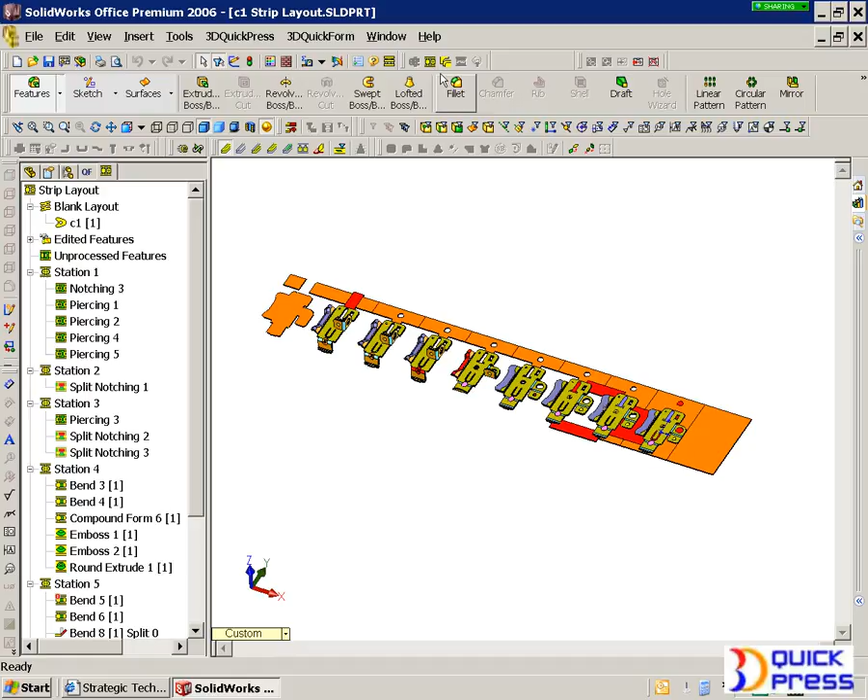Let's take it into punch design. So this is where Quick Strip kind of stops. Quick Strip, so far, what you've seen is a subset of Quick Press. Quick Press now extends it to go to the next level, which is punch design and die set creation and drawing creation. So we're going to do that by setting up a project ID and giving it the press information,

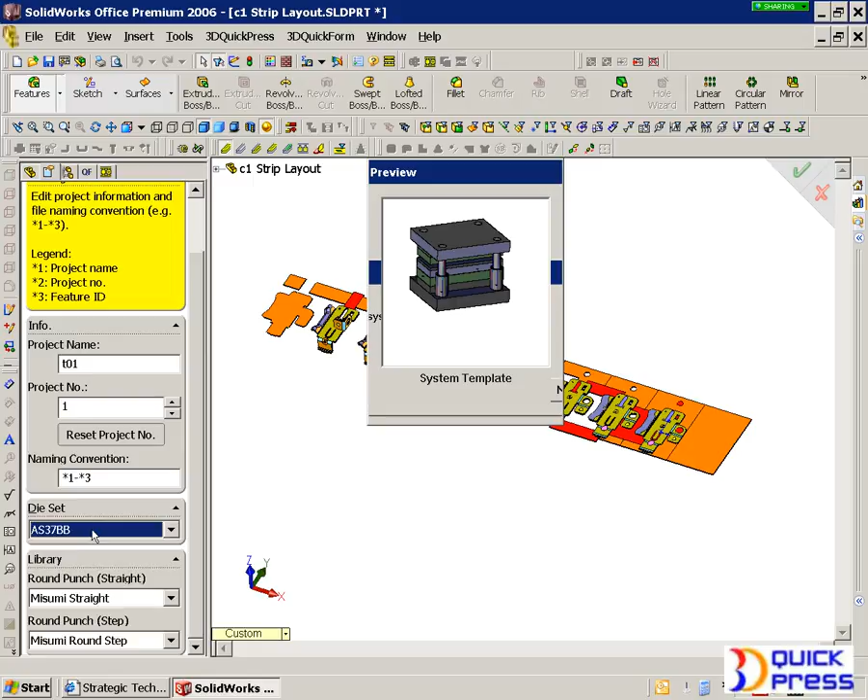maybe the style of die set, maybe it's the customer-specific one, and I'm going to give it a project name, T01, and it's going to be the first project for that project name. And then we can pick from different die set styles. These can be defined by you. So what you see here is just a series of samples. And that's really where the power comes in, is you can define these yourself very easily, and then they can be reused. Now let's go to the next one.

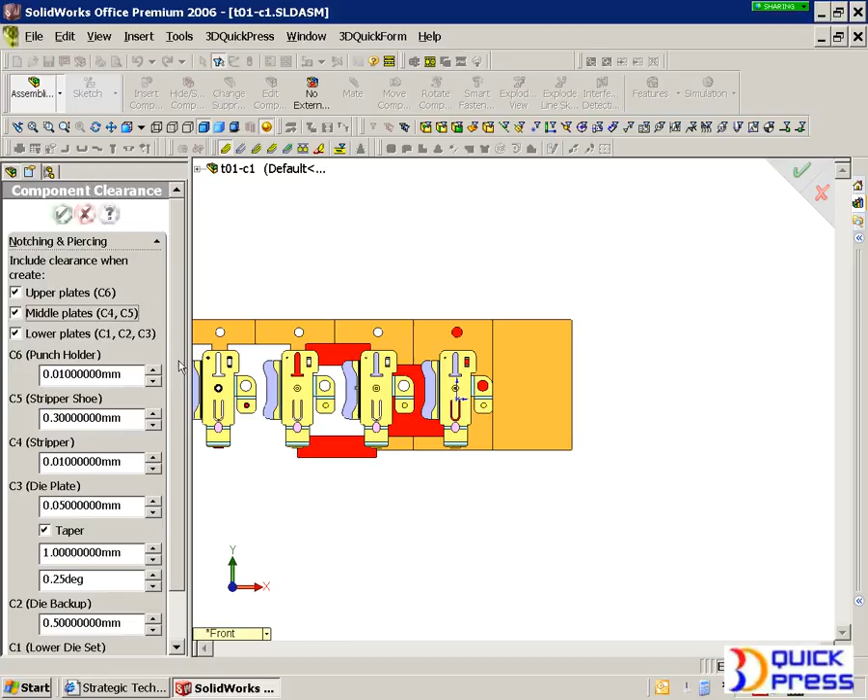The next thing it's going to say is, alright, so you got this new job, you want me to use this style of press or this style of tool set. And now what about your clearances for this job? Anything specific? You can change it depending on the style of the tool, the taper, the land. It's all going to be created for you. So you can automatically change anything we create, but it's going to give you a 90-10 approach. 90% of it's going to be done.

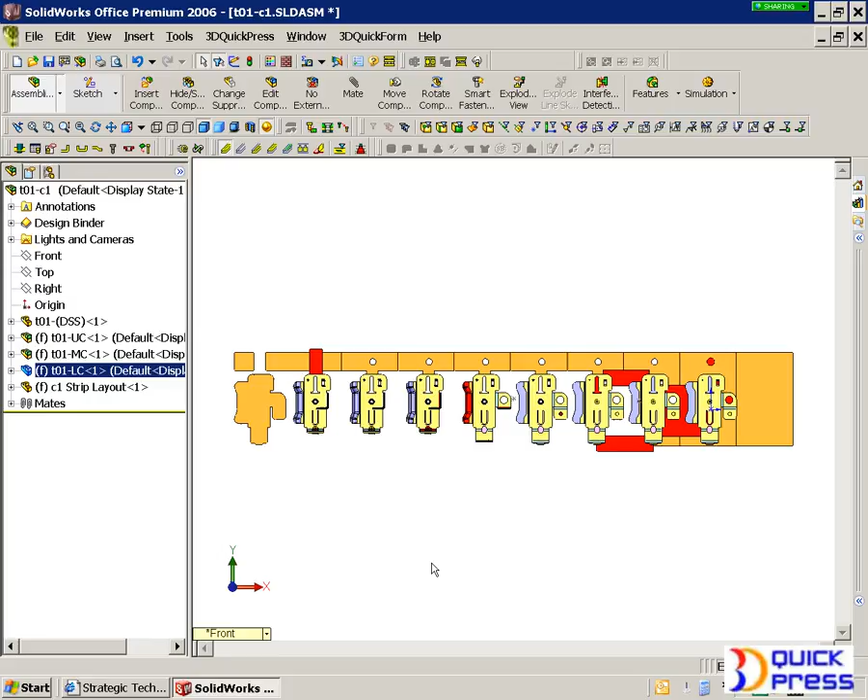Now, it built us an assembly. So we already got ourselves an assembly. You don't see any parts yet because we're going to build punches first. But we do have this upper component, lower component, middle component. You'll notice that as we build our punches, whether they're cutting, forming, bending, whatever, we'll auto-organize your die for you.

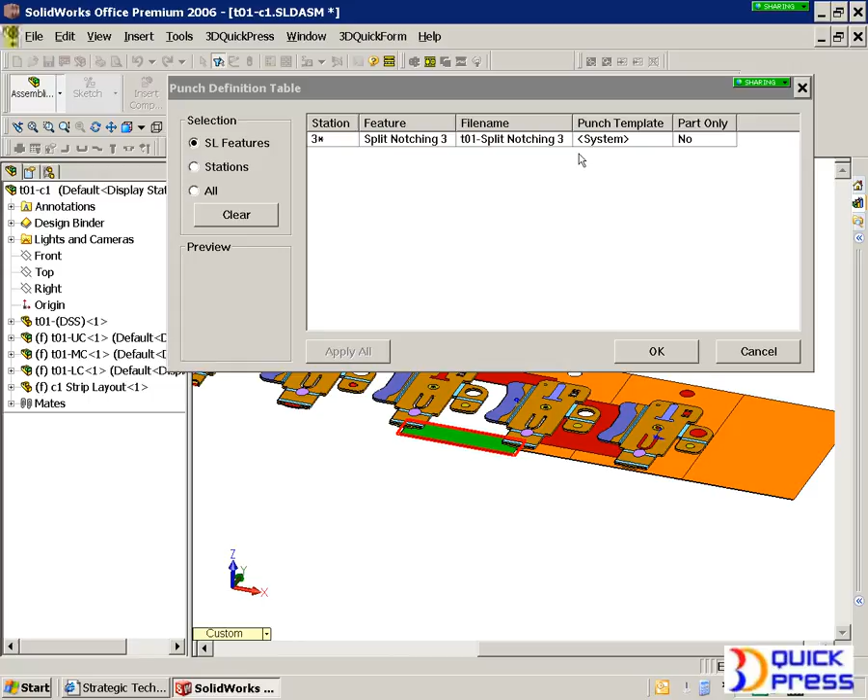Let's get started with tailoring some of the cutting punches. I'm going to pick this cutting punch right here, and I'm going to go into setup of the punch itself. I could tell it to be any type of retaining method, and these are customizable. I can tell it to use the system template, which is whatever I want as the default. As you can see here, we have many different styles, and there's no limitation on the amount of styles you can have because these can be defined by you.

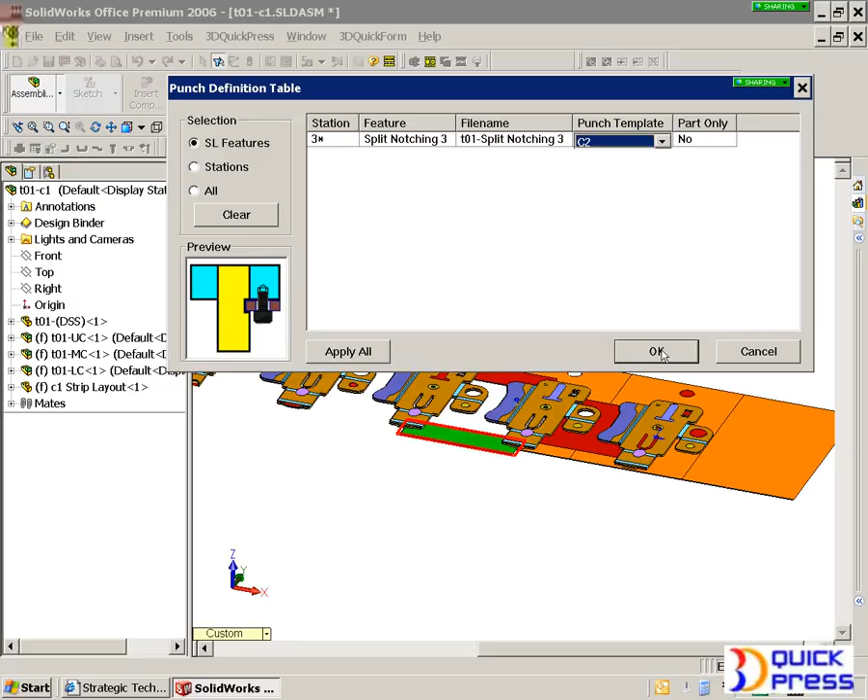So you can have everything from a manufactured, like a ball lock punch. You may want to do some other type of configuration where you have a fastener through the bottom, step with shoulder, pedestal with multiple fasteners, dowel pins, and so on. The main idea here is you can tailor it. Also, the openings that go below the die steel, you may want them to all be direct offsets. You may not. You may want them to be all rectangular. These are all variations of this.

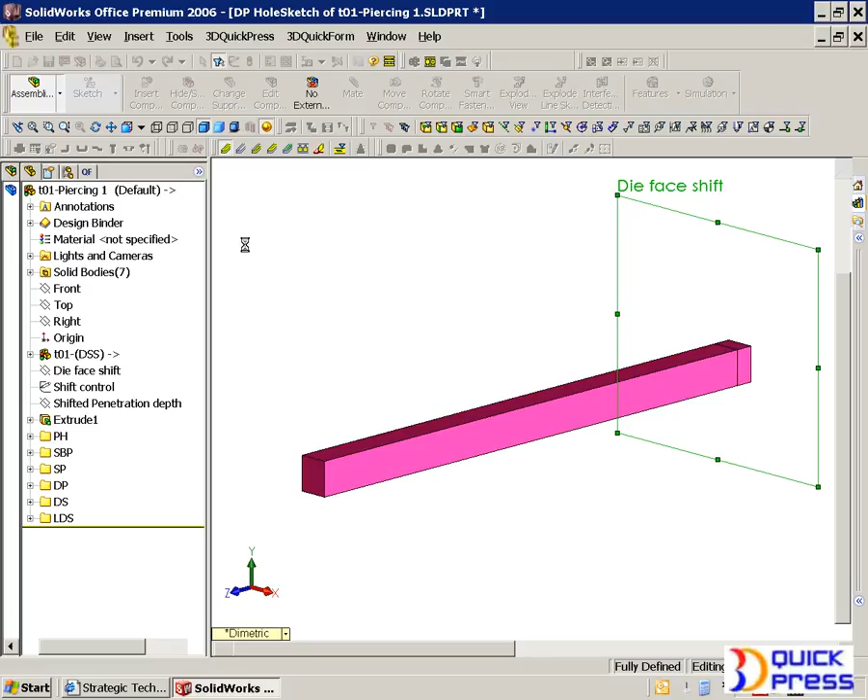Now, let's batch process the whole thing. Yeah, the whole thing. Let's take it and create all the cutting punches real time. So what this will first look for is similar punches. Okay, so let's say you have a similar piercing diameter, which is a purchase punch. It's going to first of all look for that in the catalog. If it can find a straight shank, it will. If it can't, it will create a stepped. Now, it will create all the holes through the entire die set based upon the current job information. It will also create any drawings necessary for each punch.

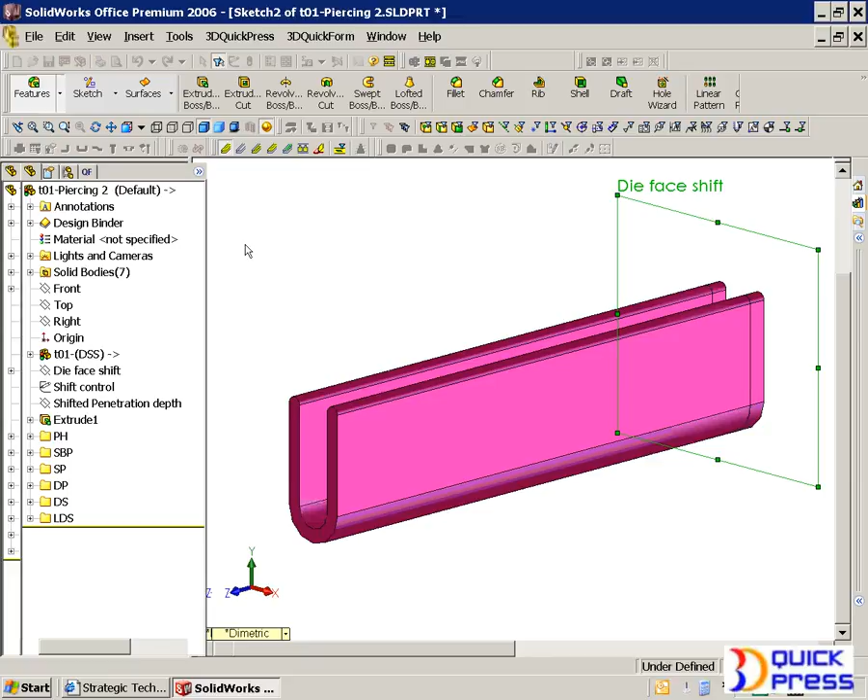But that thing about checking if it's unique or not, it doesn't only work for purchase punches, it also works for totally custom punches. So you can see there's different shapes on here. Let's say it was some kind of U shape that was used in 5 different areas. The punch will only be created once, one ID, one part number, but it will be instanced 5 times. We figure that out. Other CAD systems are going to create you 5 different part numbers even though it's the same punch. Talking about confusing people downstream.

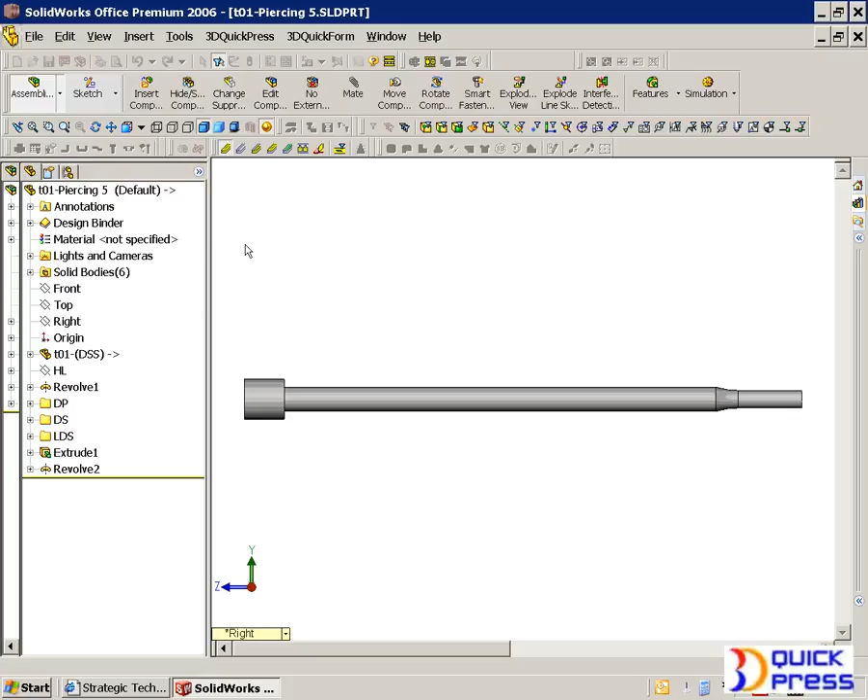The next thing it's going to do, like I said, is build all the holes. Then it goes into the punch assembly, and it figures out what assembly do I belong to. Do I belong to the upper components, like the upper die set? It could be the lower die set or the middle die set. It rearranges itself. If it's a sub-assembly, it decomposes itself and then rearranges itself. Like in a case of a bending die, right? There might be a punch on top and there's going to be a bend on the bottom. We need to dissolve the sub-assembly into 2 different areas. We take care of all this for you.

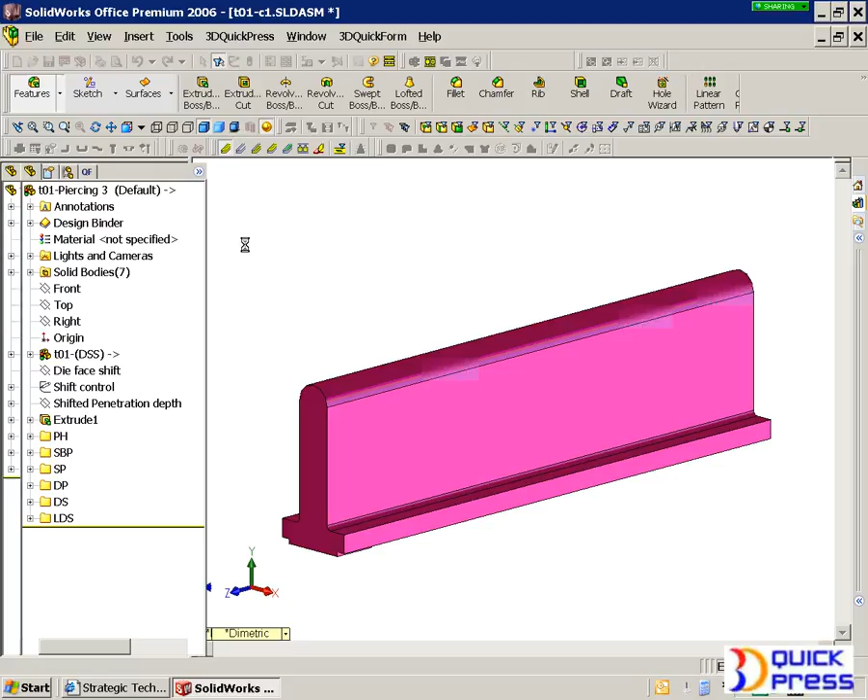On top of that, we're going to bring it into the strip layout and we're going to mount it on the strip area. You do not have to assemble this. We do it all, and we do it in high performance mode. Traditionally in 3D, you're going to mate everything. We don't mate anything. We programmatically control it with the strip itself, which keeps it very high performance.

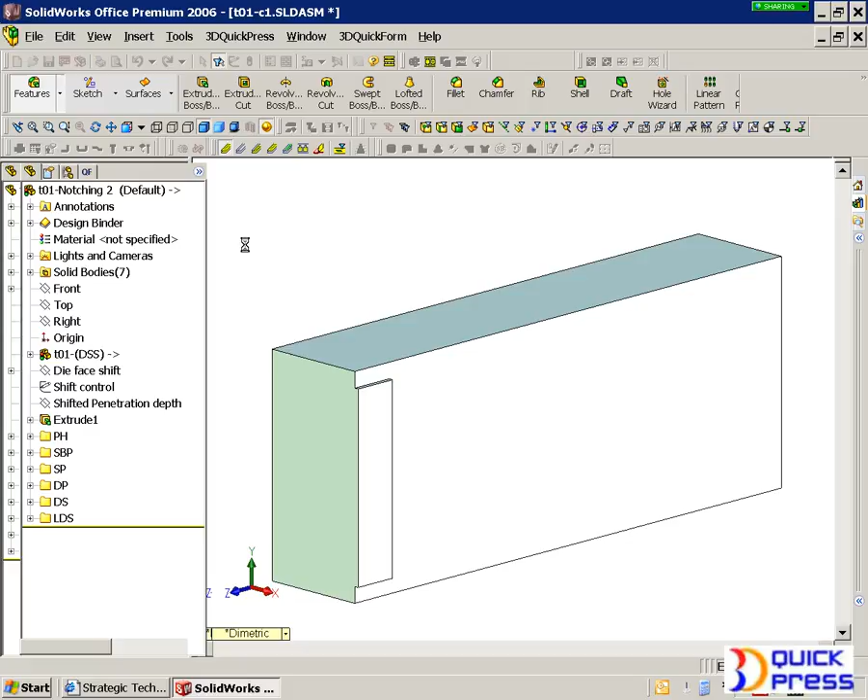So there are a number of other things, and like I said, drawings are being created too. So you still rely on drawings, which most of us do. We're going to automatically have the drawings done. Yes, you might have to tweak them a little bit, but everything is automatically picked up. The naming convention, the project ID, all the notes in there, all the attributes about the punch can be transferred into the drawing. So a lot of that is all kind of being pushed aside. If you're doing that manually today, it's going to be difficult to compete.

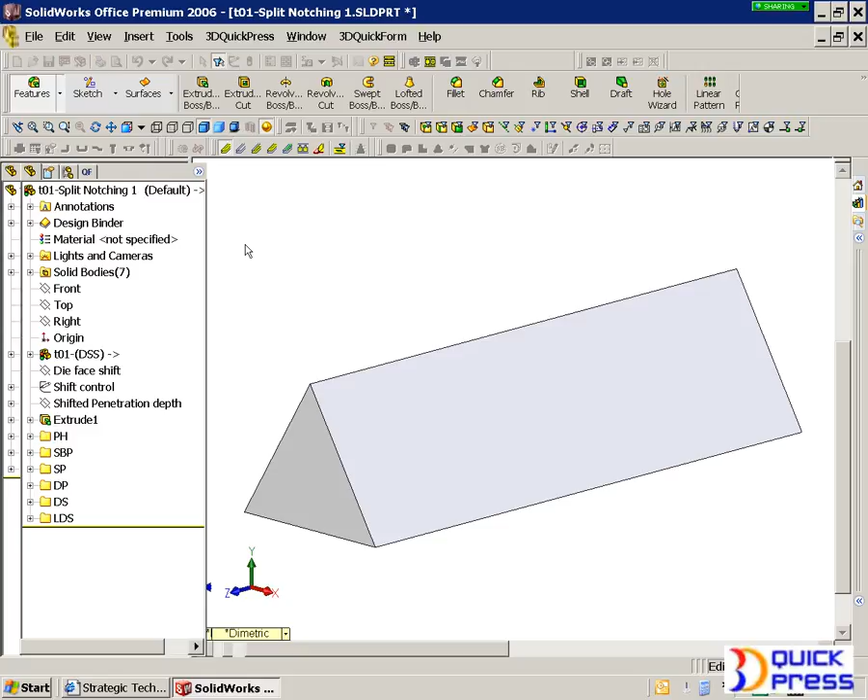So finally, it's going through and finishing up. Now it's going to bring in that last thing that I did that was custom for that one punch, that custom retaining option that I specified. It's going to look for the longest non-cutting edge, and it's going to align itself to that edge. It's going to automatically know that it's on the bottom of the punch holder because that's the way that template is set up. Well, the punch holder can be at any level per job. In this case, it knows the current level. That's the whole beauty of the automation.

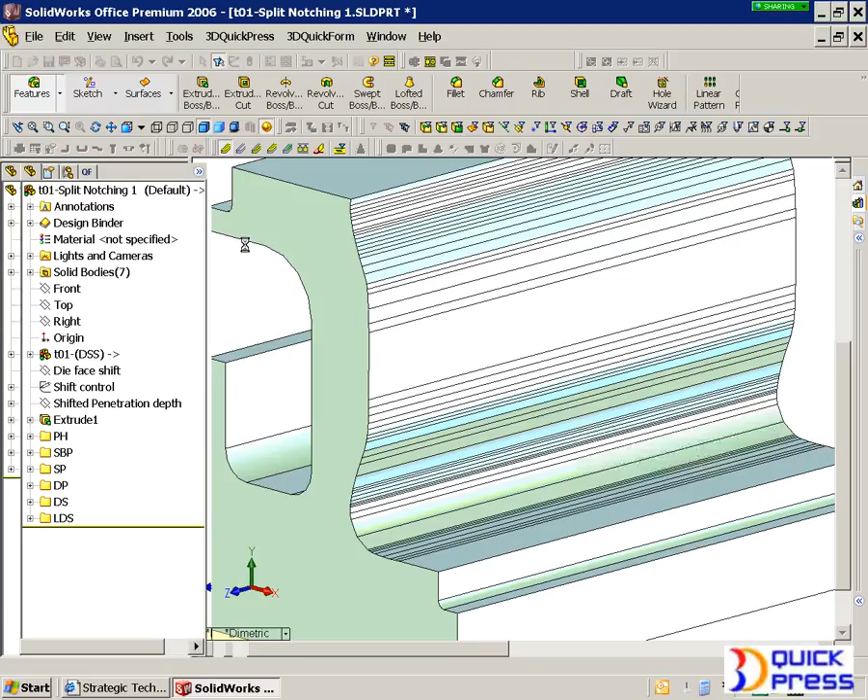Then we can rearrange it. We don't have to take where it gave it to us. You can tweak it. Everything that we create can be modified using traditional SolidWorks commands. This makes it very easy to modify if you're just getting started, for instance, and you don't know exactly how you want something created. So let us do the 90%, and then you can tweak and put your value-added design on top of it.

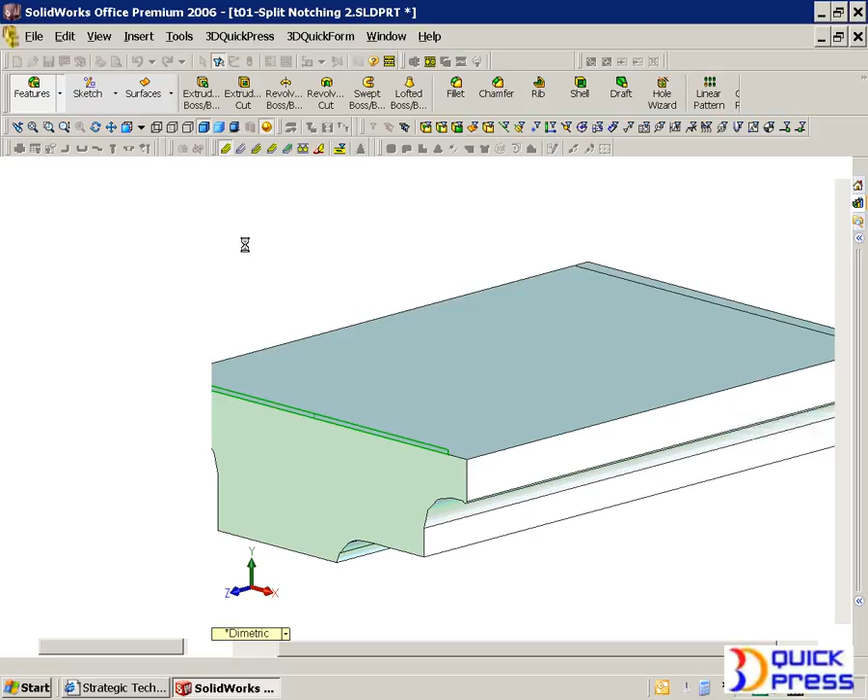So it's just finishing up here, and as you can see, it's also going up to the die face, and it's going to adjust. By the way, if there's any forming operation, then piercing or notching, we will automatically shift the penetration depth. So you don't have to, and obviously that occurs often.

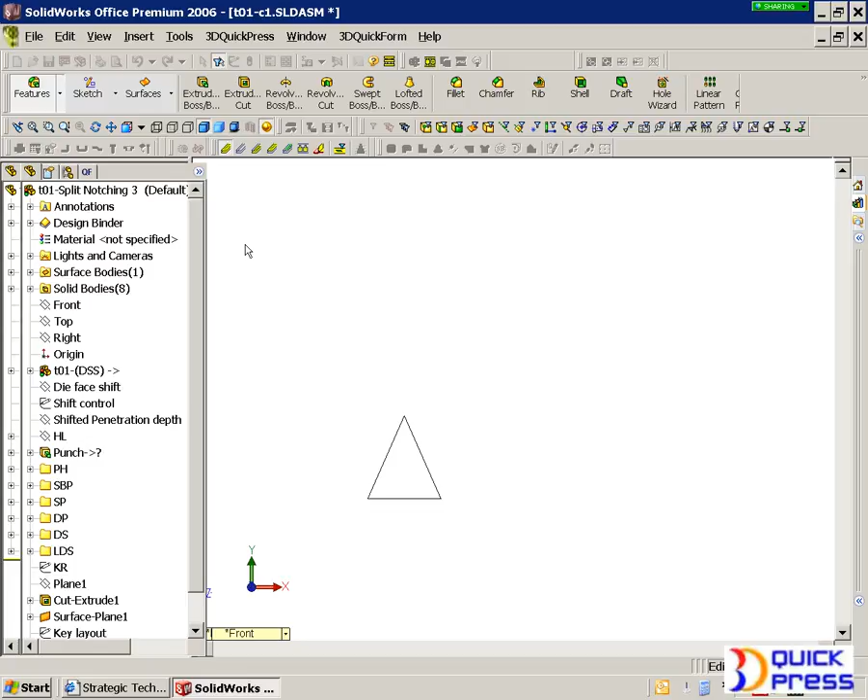So finally, let's just wrap up here. And I kind of like to do the whole thing just to show you that you could actually quote this out. If you spend a half an hour today putting together a presentation, you can quickly do that and still get your raw material properties, all your bounding boxes.

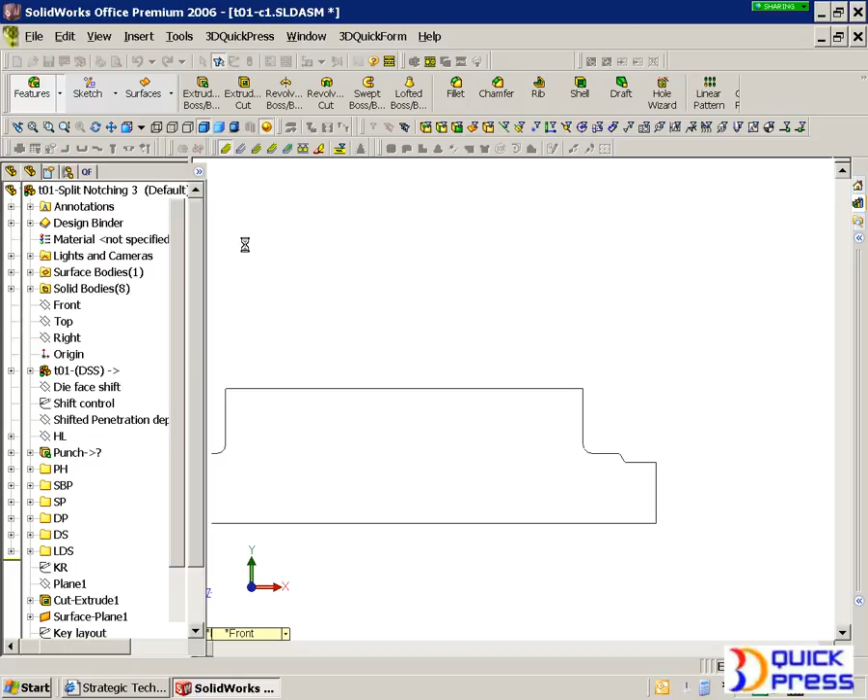And yes, we're working on a punch block notching capability, so you take all your piercings and notchings that are custom and throw them together in a cube and automatically nest them for your wiring operations. Yes, you'll be seeing that in the near future from Quick Press. So you won't have to sit there and build your own punch blocks. You just automatically throw all the punches in there, and it will automatically nest them with the material offset and so on. So these are the type of innovations; we're listening, we're taking our customers' input, and we're rocking the world. And we're only in version 2 right now. In version 3, you'll see many, many other enhancements.

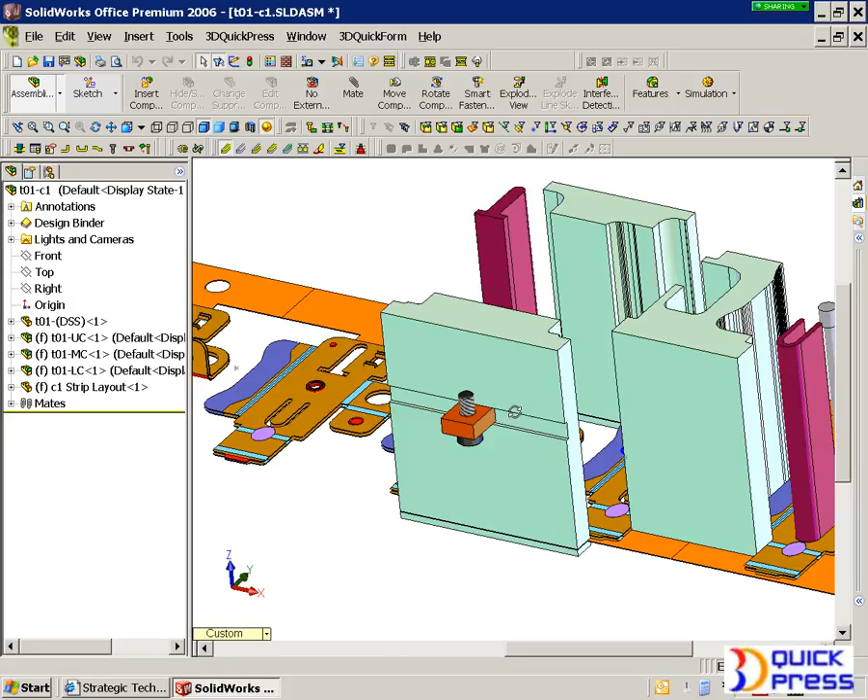So you can see there that we've got ourselves our punch set up pretty quickly. And here's that keyway I just mentioned. What if I want that on the other side? Well, simply by clicking on that entity on the top edge and just say edit the key reference, it switches it for me. So I don't have to mess around. So very quickly you can make changes and modifications. We can come back and add more punching, forming, bending, and all that real quick. Let's just keep moving here.

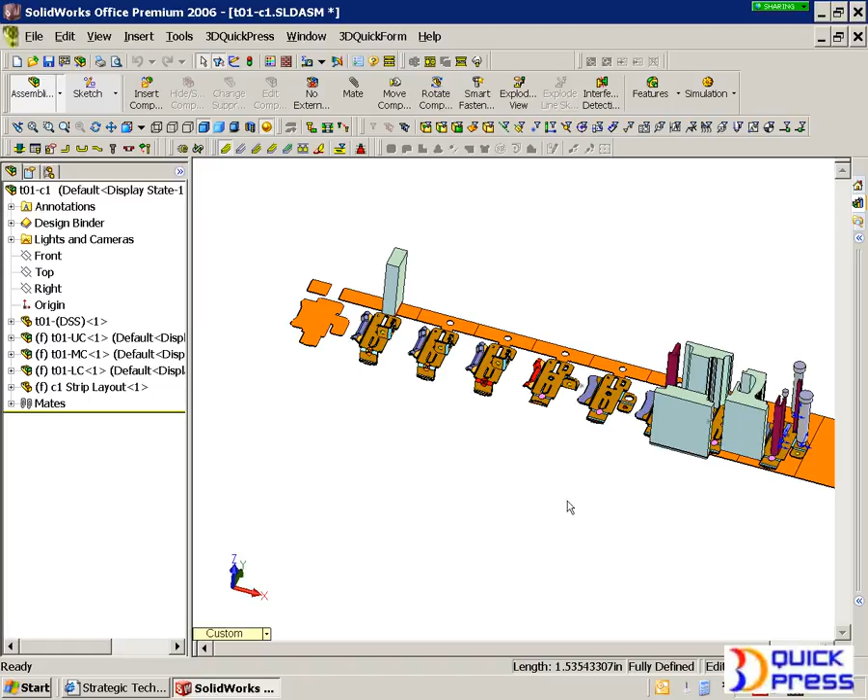Let's put an insert. I want to do another example of a PRL, because PRLs are very powerful and your imagination is the only limitation. I'm going to click on this item right here, and I'm going to click on this punch. Okay, I want to do a die plate insert. I can name it anything I want. And I want you to notice on the left here, it sized it at 55 by 14. Okay, let's make that 65 by, say, 25.

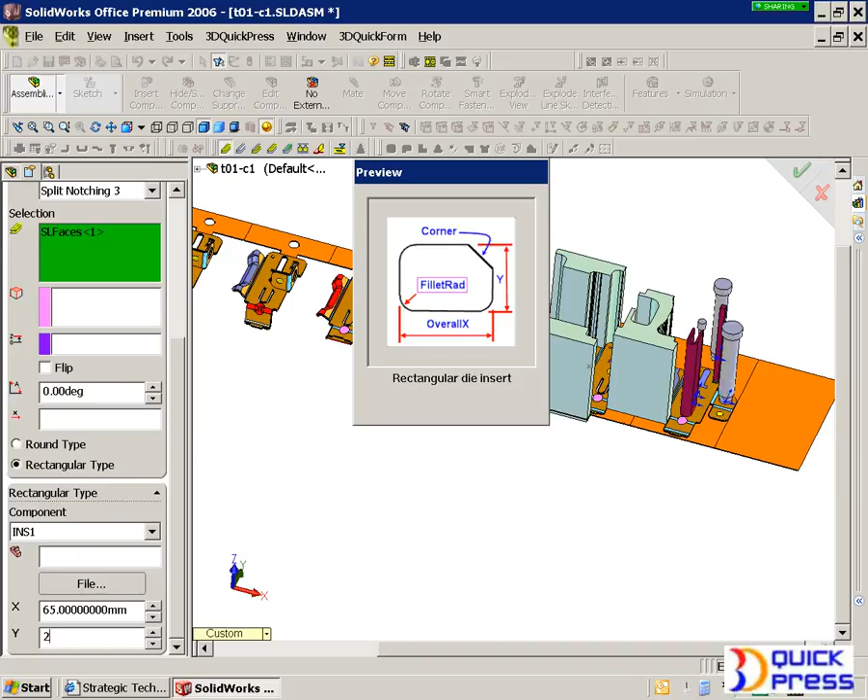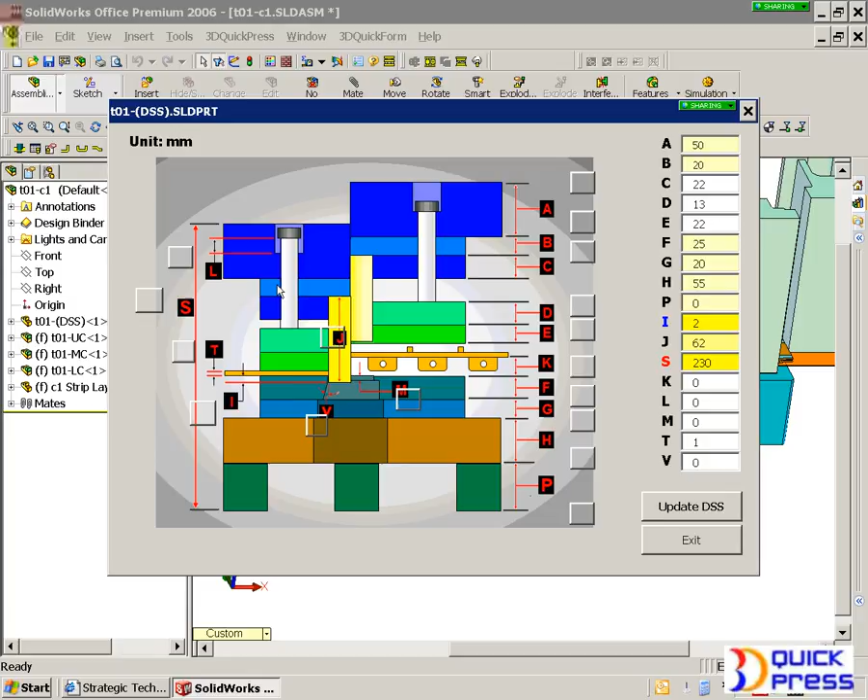The automatic adoption of this die insert will pick up on the current die plate thickness of the job. It will automatically find the center of that punch, and it will build it to my specification of 65 by 25. You'll also notice that it picked up on the thickness, which we haven't shown you the thickness wizard yet, but that's right here in the menus. And I purposely don't show it up front, because if I knew everything up front, it's real easy to design, right? And then it wouldn't be design, it'd be called robots. And you can see here that we can tweak anything about the job we want.

So you can tweak all variables of the die structure. Now let's go to the final portion, which is our die set, so we can finish here on time. Make sure we've got some time for questions, and then just click on here. And we're going to create ourselves the holes, and we'll do it on the fly. So we have an option.

Do you want to create all the holes in the die set at once, like when I build the die set? Because there's a lot of other things going on here too. We have to size the die set. It has to pick up on any thickness variations, penetration depth, all the variables we've kind of set so far. Then it's got to look through and it says, hey, what punches are interfering with what components?

And you don't want to just cut any component, right? You want to cut specific components. And we're doing it in an automatic mode, so it is actually intelligent enough to figure out what to cut and what not to cut. I think this is a very important point. So if you've done 3D, you know exactly what I'm talking about. You just can't go in a die set and start blowing through it.

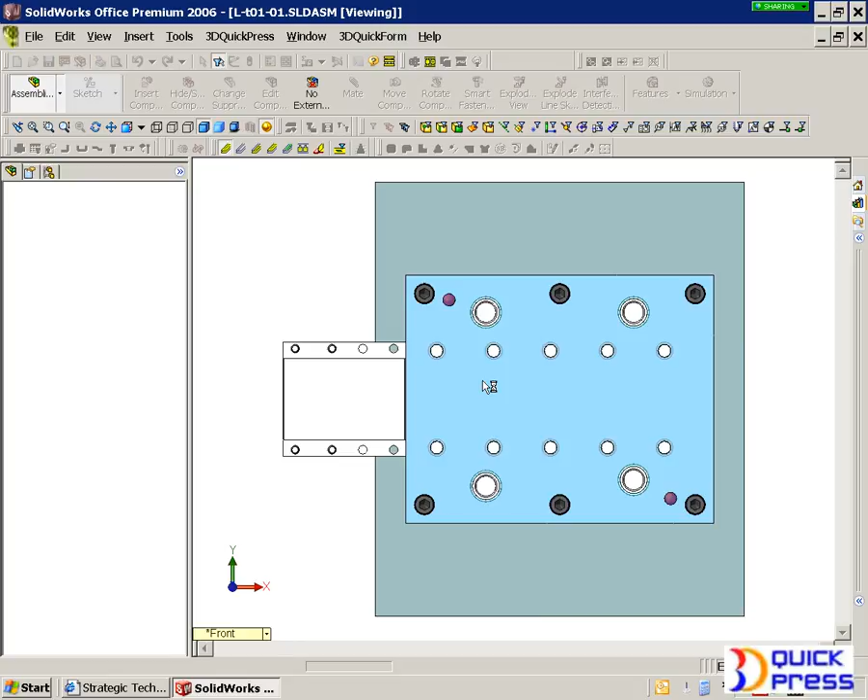You know, there's a number of reasons for that. There might be a component in there that you need to move before you blow the hole through there, right? The other thing, of course, is we need to determine which type of plate is what, so we cut the right clearance. Also, you'll notice that this die set's coming in from a previous template that's smaller, and it's going to have to get bigger. So there's a lot of 2D things driving this, and you can tweak it before or after.

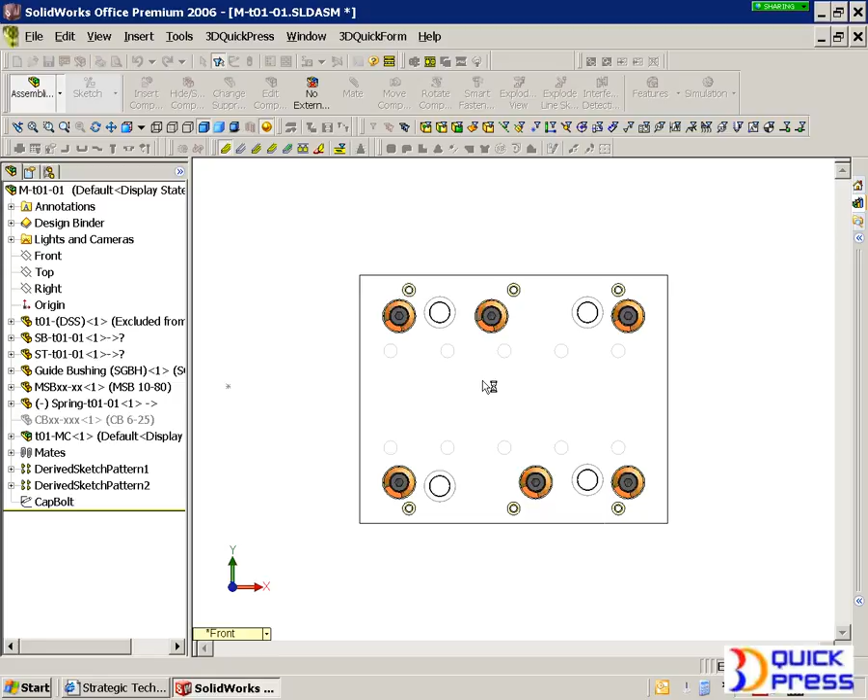So you don't have to know where you're going, and that's true design, is you have to get into it in order to tweak it. The whole idea is how much manual work are you getting to add value to the job. So here we're going through, each assembly is being created, so now we have a final upper, middle, and lower. And of course the components are being transferred into the proper subassemblies.

Also, everything's being renamed, so you don't have to sit there and mess around with all the different combinations of naming conventions for the current job. Of course, standard components don't have to be renamed. They could be called from a standard location, or they could be if you prefer that. Finally, what it's going through now is it's doing the whole creation.

You can see it's going through and it's checking, okay, I got a series of punches, they have to go through certain plates, and then of course we got that insert sitting on a punch, so that means that the insert needs an opening, and the punch itself has to go through the insert. And all these things have to be figured out.

So we're doing it very, very quickly and much simpler than you doing it manually, because we won't forget about a hole or two. You might be able to do that. We want to take that off your mind, and we want to allow you to do true value work, not just redundant simple operations that have to be done.

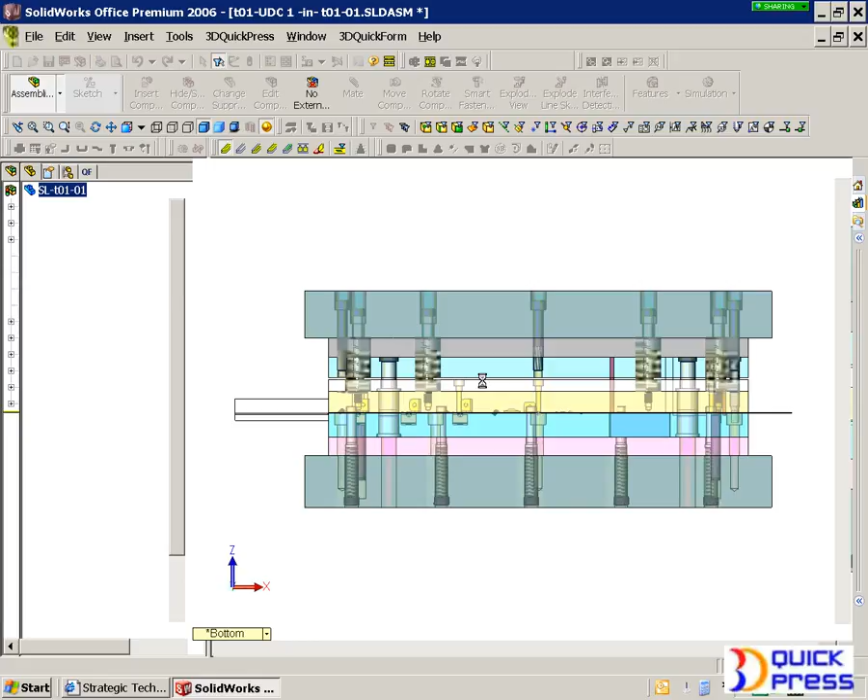So finally, you can see it's going to be creating the holes, and you'll see kind of through the model. Right now it's in a transparent mode, so you got a kind of a glass model to work with. Also, we can modify anything now. We can go back to the part, change the part. If we want to just go to the strip and change the process, we can do that. If you want to change a punch or two, you can do that.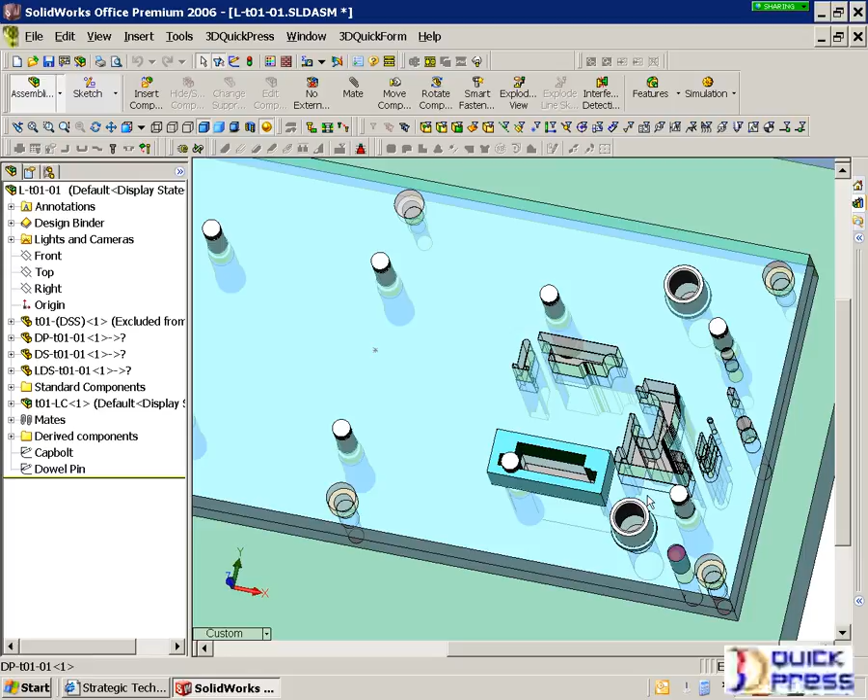And then on the bottom here, you'll see that we have a series of different assemblies. So I'm going to pick up the lower assembly, and you're going to see that we have a number of design issues going on here, but at least we can see them. Notice this lifter came right through the actual insert. The insert itself has the taper and land and its clearances, but the lifter is coming right through it.

Why did it get cut? As I mentioned earlier, it's intelligent. Also, if I want to change the lifter position, guess what I do? Change a 2D sketch. Yep, majority of the stuff you see on the screen is driven from 2D. That's the way 3D works, but also a methodology. There are different approaches. What I'm going to do is edit the sketch.

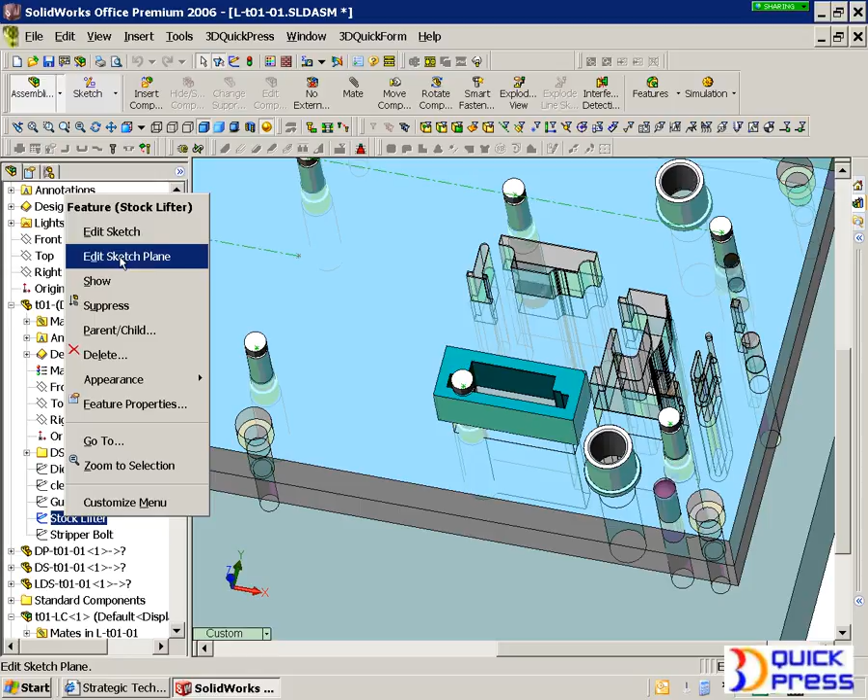And not only is it an easy sketch to modify, it's a series of points. It doesn't get any easier. And I'm sure that if you've done 2D work, you'll agree. There's nothing easier than modifying the simple primitives of points. What I'm going to do is change the position of the point, and I'm going to add a point.

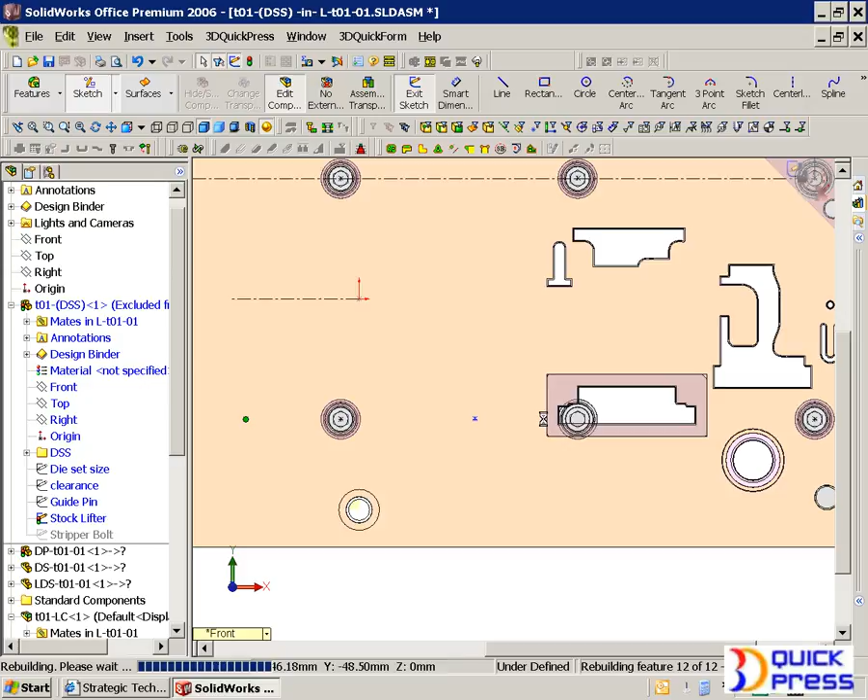Alright? So just to give you a flavor of how to make a change in 3D: once the point tells it the position, of course the assumption is you need the same type of lifter but a new series of holes, and of course you've got to move the original and make sure it doesn't disrupt where it was at. We need to heal all that up, and it's being done for us automatically. It's checking the interface. You can see that it's rebuilding it, making sure that it's cleaning itself up. And now you notice that we've got ourselves a new lifter and the original one moved.

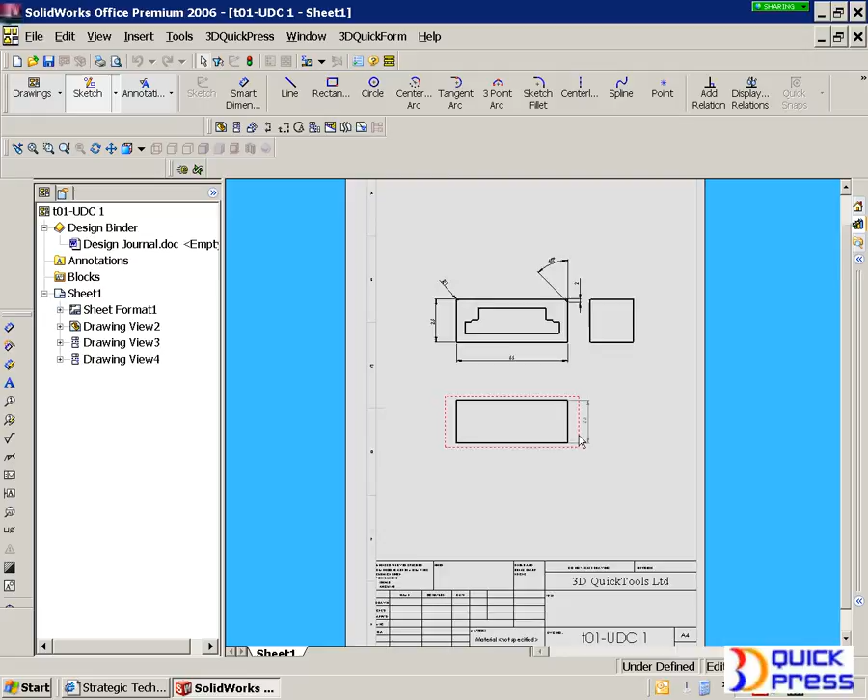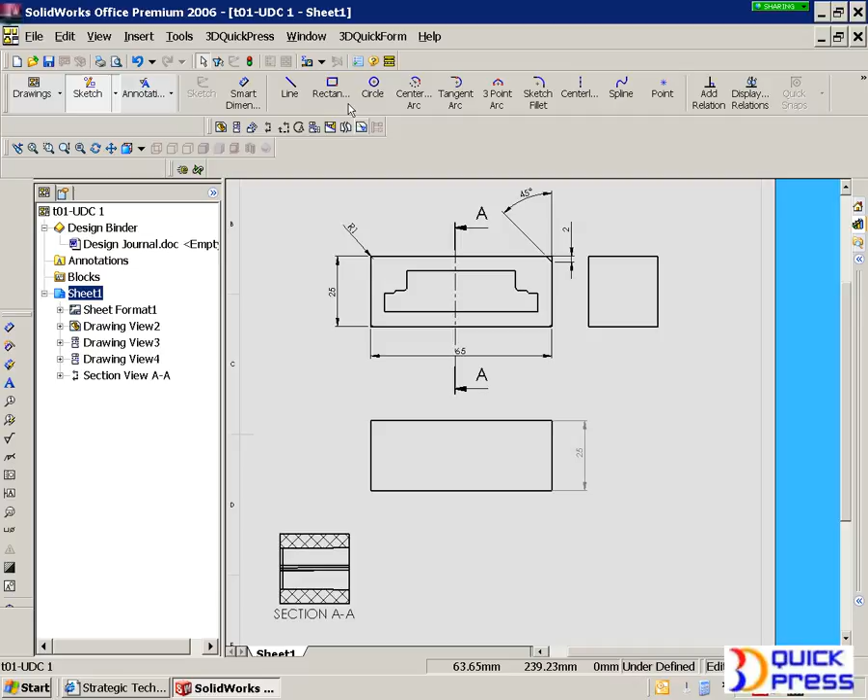Here's the actual insert, and if we open up the part drawing, here's the drawing of the insert. Now, this is a very basic drawing, but you get the idea. It's been renamed to the current project. You can do anything you want. All the detailing and all the capabilities of SolidWorks are very powerful. I don't spend a lot of time on it because it's called core SolidWorks at this point. Bills of materials are automatic, hole tables are automatic, auto ballooning, sectioning, details. There's probably 8 different ways to section, 3 different ways to do ballooning, and so on.

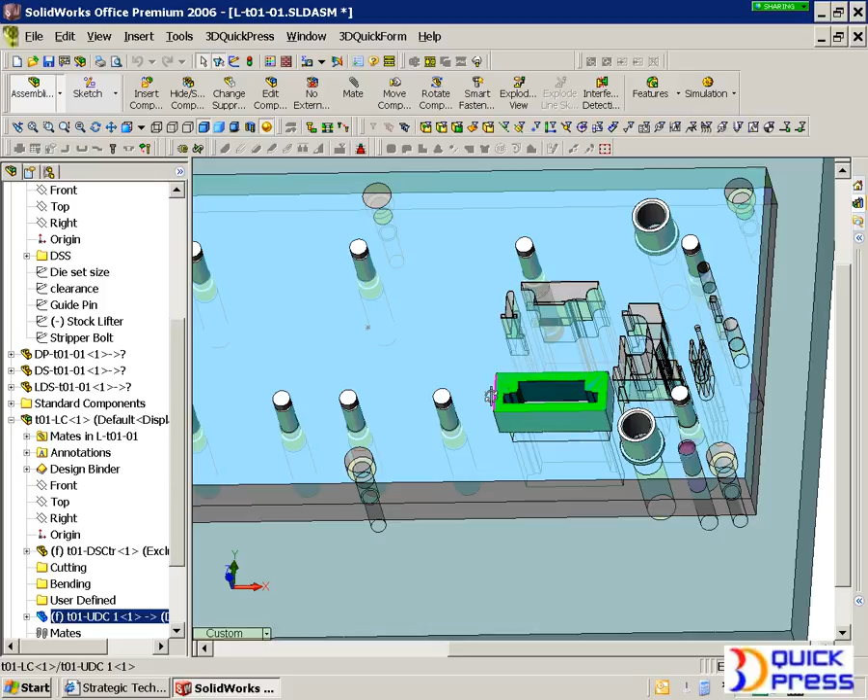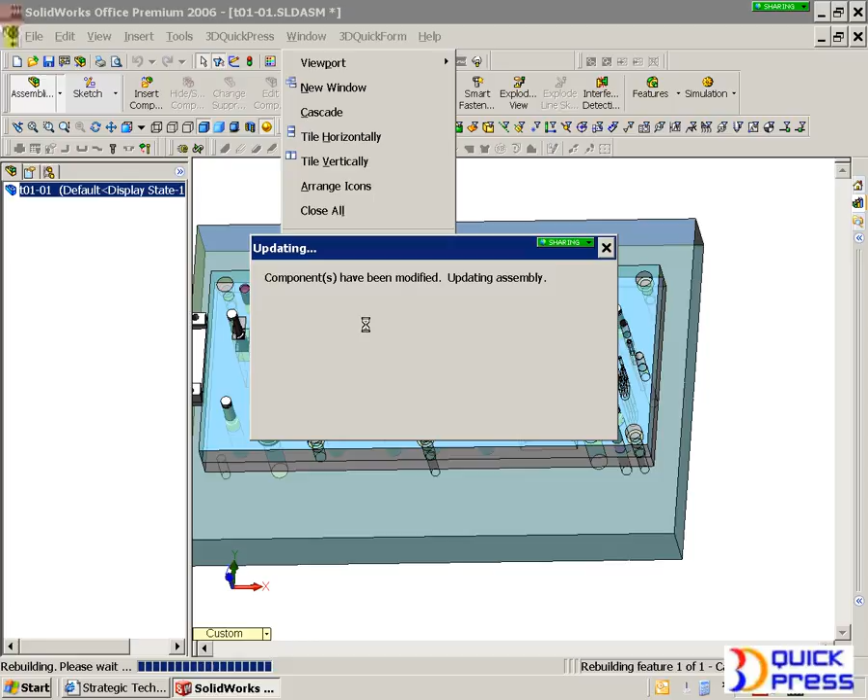But I do want to show you that this is also very powerful from a communication standpoint. Two more things. One is, can you animate the die and put it into motion to understand the visual and the timing properties? And yes, we're always trying to make it better to do it in a virtual environment before you start cutting steel. So if you can visualize the movement of the die and you can see where the camming operations are occurring, where interference is occurring, isn't that going to save you time and money and rework and frustration?

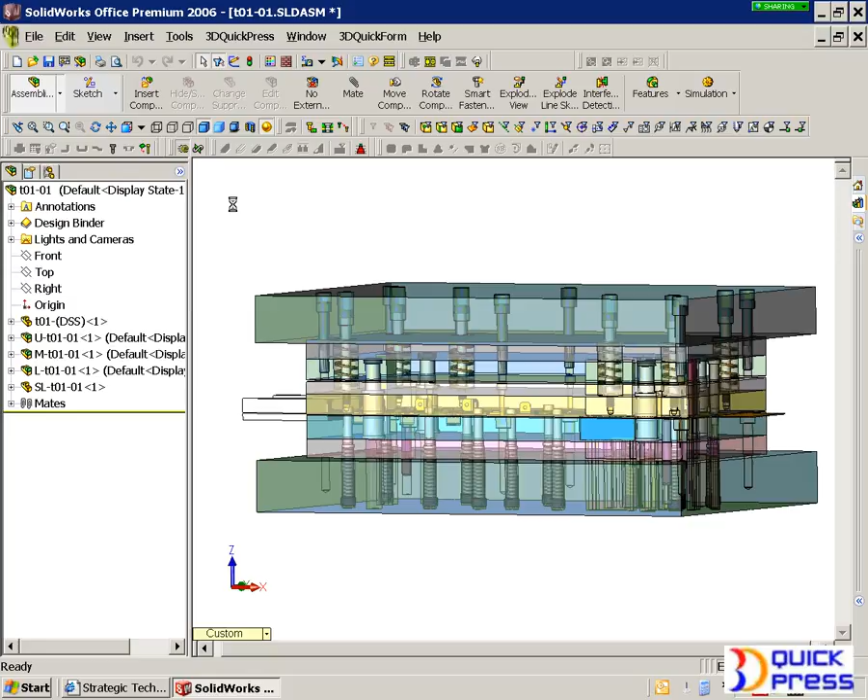Well, it's certainly going to blow your customers' socks off, because while your competition is giving them 2D approximate strip layouts, you're giving them an eDrawing of this entire die set, and you are empowering them to cut the part. You can do anything you want, and you've got all your raw materials calculated. And what you can do right here is click on that eDrawing button, and it will automatically create it. And this file is less than half a meg. You can't even touch that in 2D. And you can see here that I have the 3D model, and this entire thing is free to your customer.

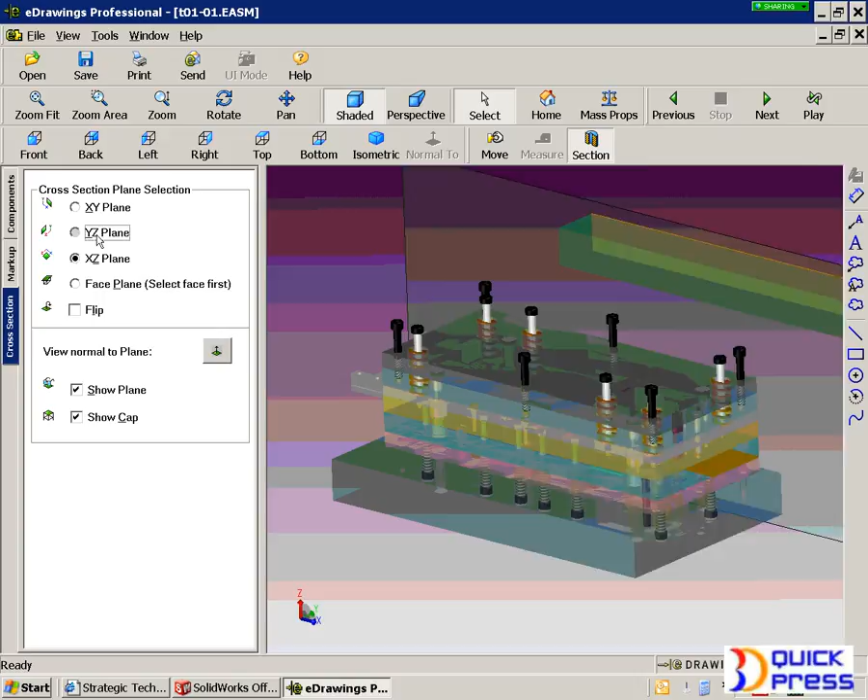Now, if I want to move a component, I just grab the little move hand, click over here and move that component. If I want to explode the assembly, I click on explode. If I want to put an animation in here, I can. How about sectioning? If I want to section it, or the client wants to see, or maybe the shop floor, after you get the job, you want to give them a better tool to understand how you designed it. And then finally, on the left here, you'll notice that you have the full tree. So you have all the part numbers, and you have all the manufacturer information in here.

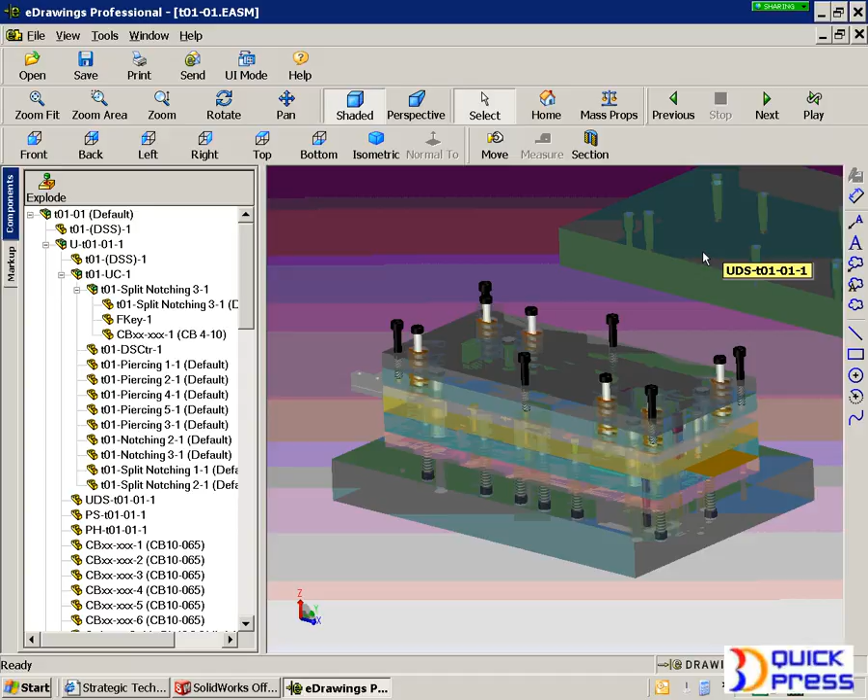So the whole idea of communication has been really enhanced by you utilizing 3D technology, cutting down on errors, time to market, and ultimately just less hassle, less manual type work, so you can focus on true value-added design. So at this point, that pretty much concludes my introduction presentation. And I do stress that was an introduction because there's so much more to our application, but I can only do so much in about 30 minutes.